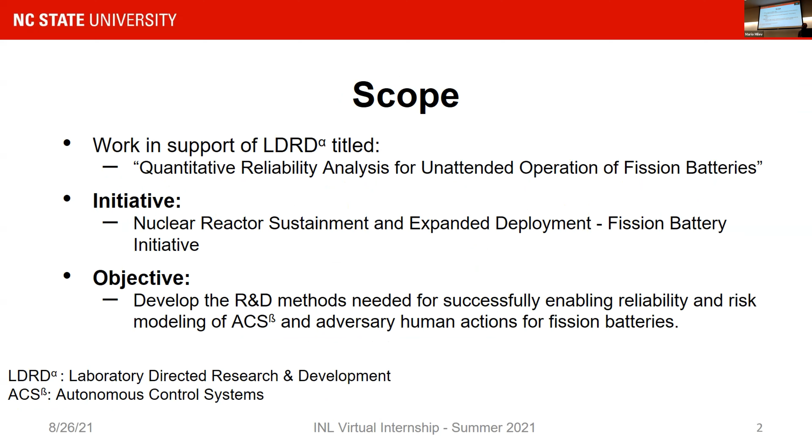So a lot of terms here. We're looking at what a fission battery is. Essentially, INL defines a fission battery as a fission reactor with some other attributes, such as being economic, which is to say cost-effective throughout the entire life cycle; standardized, in the sense that it should be modular, able to link together with other things and deployed easily; and then installed, which means you can deploy it and just forget about it.

And of course, unattended, which means once you deploy it, you can just kind of walk away from it. So it could be in a container or something like that, and you just walk away from it, and it's running by itself. And reliable, which means hopefully you don't have to come back to fix it.

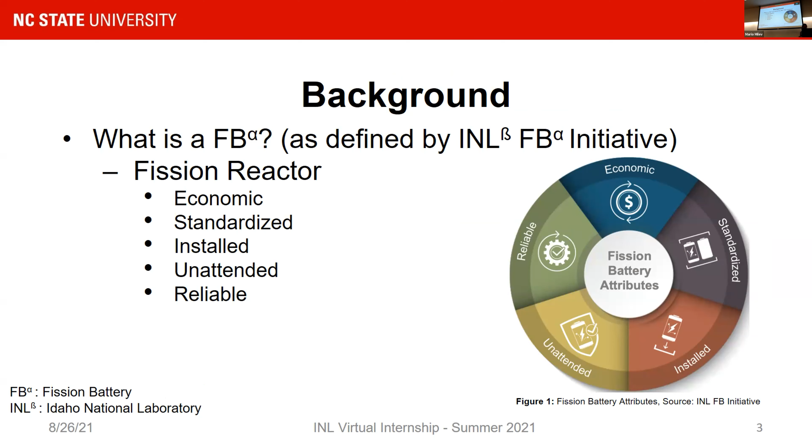And so what is the motivation for doing this? Well, if you want to build anything that's nuclear, you need to follow the licensing requirements, right? And the NEI 18-04 document provides guidelines. There's a non-light water reactor draft that provides the guidelines. And part of that is to perform a PRA, which is the probabilistic risk assessment, for a fission battery.

And when we do that, we want to make sure that we make realistic assumptions about our system. And so part of that is to model the control system reliability as it is. Since it's an autonomous system, it's going to run on its own. There's going to be no human operator in the loop at any given point in time, apart from maybe installation and end of life stuff. And so historically, this type of work has been done for space applications by doing rigorous testing. That's true if, let's say, you're sending out a satellite or something in space.

And in that case, you will do a lot of testing before you send out your satellite or rover out in space. But oftentimes that's not possible and it's expensive. So we can do something else, which is simulation.

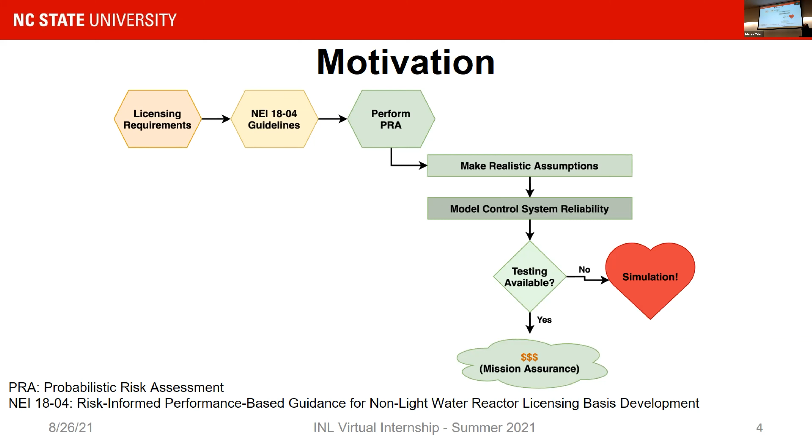And that's the core of this particular research. And so what we're simulating here is a fission reactor. This is from 2004. It's called SAFE 400, which is the Safe Affordable Fission Engine. And this was built for NASA by Los Alamos. And it's used for propulsion, but it contains in it a 400 kilowatt...

This is going to keep doing that, so sorry about that.

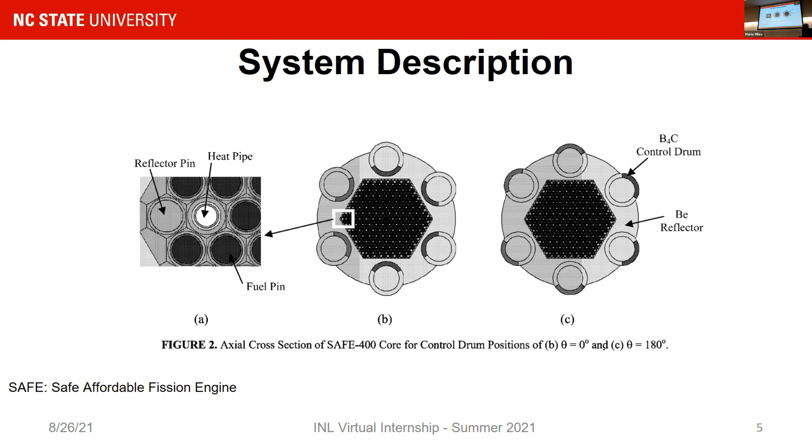So it's a reactor with control drums to moderate the fission rate. So as opposed to a typical reactor that you may have seen that has control rods, this thing has control drums, which means instead of moving linearly, it moves axially. And so as you can see on the diagram, there's some B4C, right? All right, so that's our system.

But we want to be able to control the system. And so if we want to control the system, we need to come up with a control model. Always one step ahead. And so in this case, the plant is the control drum or set of control drums. In this case, it could have been 5 or 6 control drums. And we have a typical classical controller, which is a PID controller, which is a proportional integral derivative controller.

And in this case, it's cascaded together with a high-level input which says, look, I have a reactivity target. I want my reactor to be at a certain reactivity at any given point in time. And I want to do that by mediating the control drum position. And so that's the first PID that you see.

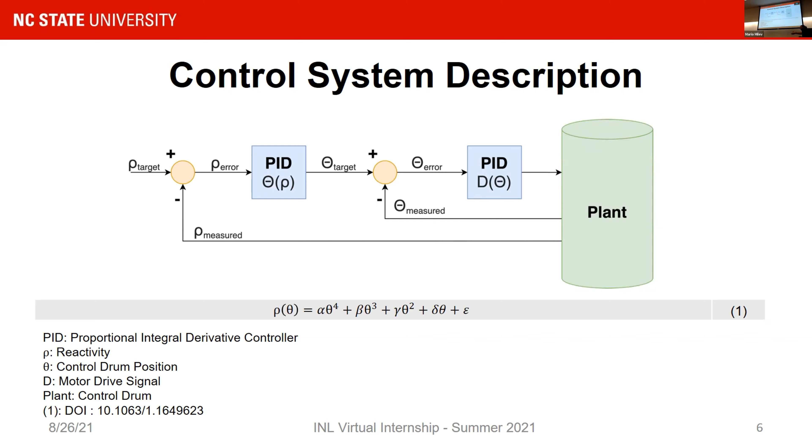The equation here comes out of the work of Dr. Shannon Bragg-Sitton from, again, 2004. And so this model is built around that logic. And so we can go from reactivity to control drum position to the actual motor drive signal that moves the control drum in position. And so that's the system. Now we need to talk about what are we doing.

Typically, a PID controller is not implemented as one thing on a computer, or on your autonomous control system. Typically, it's part of a PLC that's running hundreds of PID loops at any given point in time. And that's ultimately modeled as computer hardware. And so if you want to be able to capture failures at the controller level, we want to be able to look at, well, what's the code, what's the hardware, and how do those interactions happen?

And so this is a typical pipeline that we have kind of seen over here. So you start with the source code. So that would typically be the logic diagram or the source code for a PID controller or a set of cascaded PID controllers that you compile into hardware-specific assembly instructions that's dependent on your machine. So if you're running it on your home computer, it would be an x86 processor. If you're running it on a Raspberry Pi, it would be an ARM processor. If you're running it on a PLC, it would be specific to the PLC's logic.

And you compile that, and using this tool called LLVMPars, which is also part of the DEPM methodology, we create what is called the DEPM model. As an input, you also need, so it converts all the assembly to failure models. And for each instruction at that assembly level, you provide a failure rate.

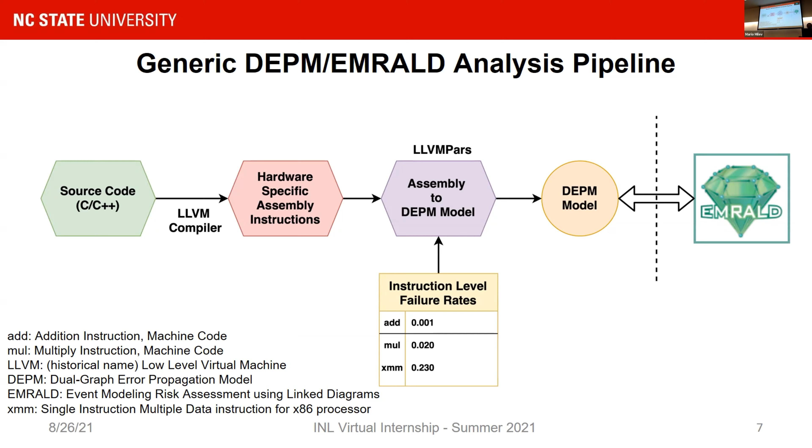So with all of that, what we get here is just one half of the DEPM model. It's all the relationships between all the instructions. So if you don't look at assembly, don't worry about this. It's a lot of move operations. Move the data here, move the data there, etc. Anyway, it's there. I just wanted to show you that.

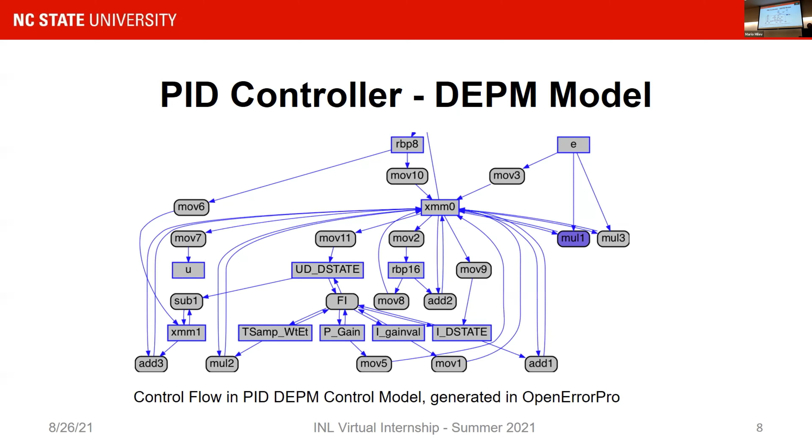And when all of this is done, oh, I should also mention, over here, we were only modeling the PID controller. There's also the entire control drum. We haven't modeled that. Modeling the control drum requires further analysis. You have to look at the physics of failure models. You have to look at the mechanisms by which it would fail. And so statically, we have performed some analysis here using a simple fault tree.

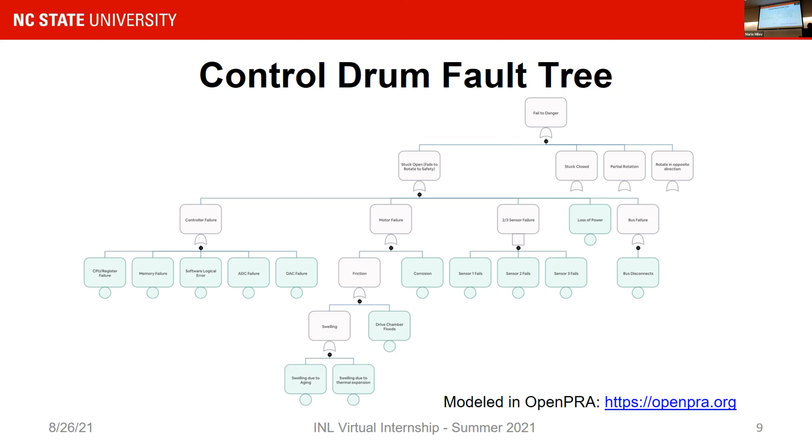This is done on an in-house tool that our lab is building. It's called OpenPRA. You can access it at openpra.org. It's free to use, and if you want to develop software for us, that would be awesome. And so that's for the control drum side.

And now we put everything together. So I haven't mentioned anything about EMRALD. EMRALD is a tool that essentially performs dynamic event tree analysis. And we link DEPM to EMRALD, and we map it from the failure space to a function space.

So if you can instrument your PID controllers appropriately, you can measure the flux, you can measure the temperature, and then on the fly, get a new failure probability for your PID controller. And as you saw, the system itself was pretty complex, so you can't directly make that assumption. You have to run the model and get some results.

One thing to mention here is that this is all based on discrete time Markov chains, which means it suffers from what is called state space explosion, which means you get too complex of code, and then now you're waiting until the heat death of the universe and all of that. So you don't want to do that. So there's some part there where you have to be careful as to how you design it.

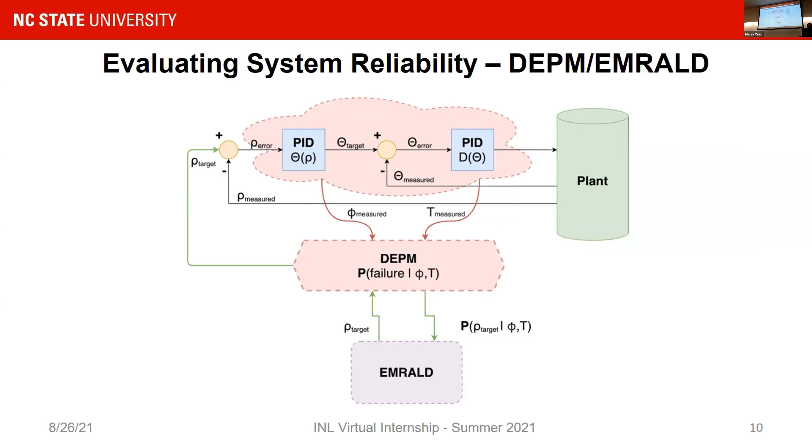So that's the model, and this is ongoing work. There's a lot going on right now. As I said, this is the first year. There's at least a couple more years of this work. We're going to continue doing that. And I've skipped a lot of slides, but here we are.